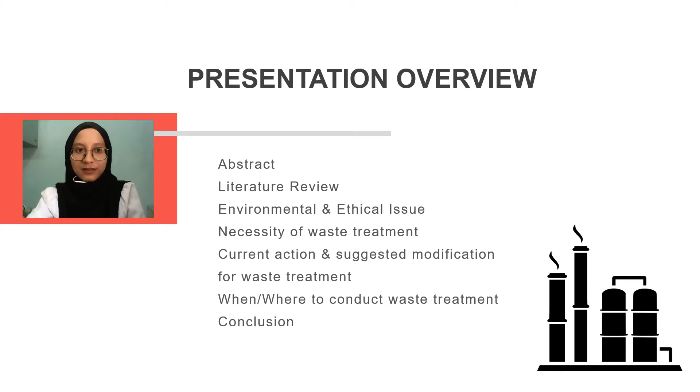My name is Kamarina. I will present the abstract of this study, which can be divided into 5 parts. The first part is the role of engineer, which is to ensure that the waste is disposed and treated in a correct manner according to the regulations specified by DOSH, NIOSH, and OSHA. The second part is the environmental and ethical issue. Some of the environmental issues identified are the loss of containment, atmospheric emission, and release of hazardous air pollutants. Some of the ethical issue identified is poor waste management practice.

The third part of this study is the necessity to treat and dispose waste correctly, due to the nature of waste itself, which can be hazardous, corrosive, and even flammable. The second reason is to comply with the standard regulations. The fourth part of the study is the current action taken to mitigate the issue, the problem arising from this current action, and the modification that can be made to improve the current action.

The current action to mitigate the environmental issue is flaring is chosen instead of venting, because flaring releases lesser greenhouse gases compared to venting. However, it cannot completely remove the greenhouse gases, which can eventually cause global warming. Due to that reason, it is advisable to install a flare gas recovery unit (FGRU) to reroute the flared gas for power generation.

Next, the current action that can be taken to mitigate the ethical issues is the surveillance of waste practice management. However, this will add additional cost. Due to that reason, we suggested to use an analyzer instead of manual sampling point.

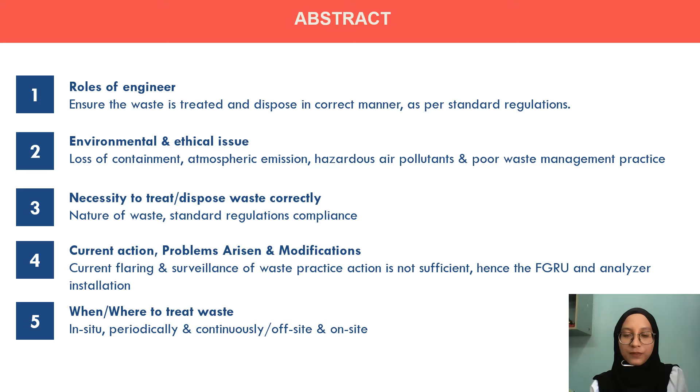My name is Oman Hakim and I will continue this presentation with literature review part. So for this part, I will explain more about the waste and also type of waste. Waste is any substance which is discarded after primary use or is worthless, defective and of no use. In biology, waste is any of the many unwanted substances or toxins that are expelled from living organisms, metabolic waste such as urea and sweat.

Waste can be categorized in many types such as municipal solid waste, biomedical waste, industrial waste, agricultural waste, and radioactive waste. Municipal solid waste is a solid waste that includes household garbage, rubbish, construction and demolition debris, and sanitation residue. Biomedical waste is a solid or liquid waste including containers, intermediate or end product generated during diagnosis, treatment, and research activities of medical science. Next, agricultural waste is a waste generated from farming activities, and this substance is mostly biodegradable.

Industrial waste is a liquid or solid waste that is generated by manufacturing and processing units of various industries like chemical, petroleum, coal, metal, gas, sanitary, and paper. And the last type of waste is radioactive waste. It's a result of many activities including nuclear medicine, nuclear research, nuclear power generation, rare earth mining, and nuclear weapon reprocessing.

As you can see in the slide, there is a waste contribution where you can see the majority of waste comes from industries, and only 8.33% comes from household and 5.78% from others. This means that much waste comes from industry, and that is why our topic is focusing more on industrial waste. Even statistics prove that 7.6 billion tons of industrial waste are produced annually.

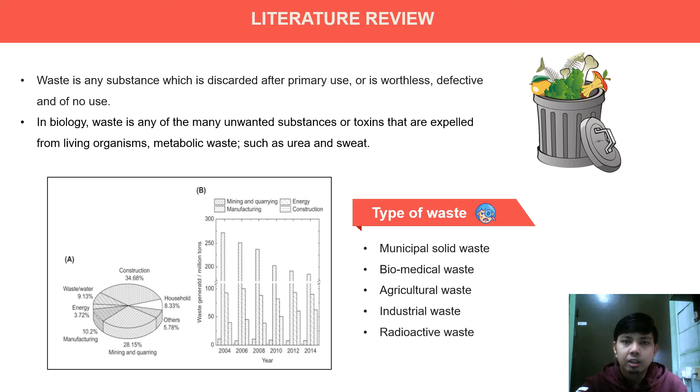So how, what, where, and when the issues can be solved will be discussed later by my friend after this. With that, I think that's all from me today, and I will pass the floor to Kamarina to discuss more about the issues related to this topic.

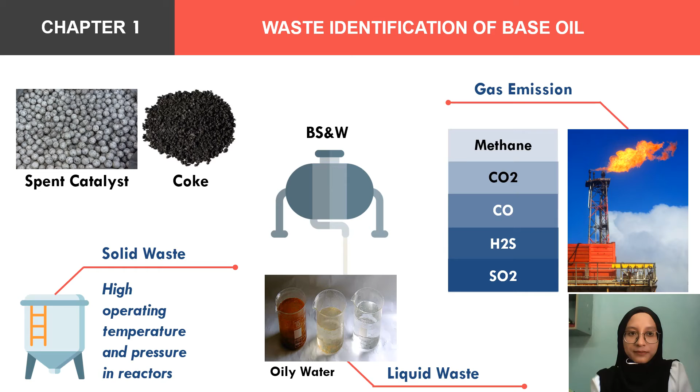The first issue is the loss of containment, which is due to the removal of coke, venting, and flaring. The second issue is atmospheric emission due to venting and flaring also, which release greenhouse gases which can cause global warming. The third issue is the release of hazardous air pollutant. In the hydrocarbons, usually there are volatile organic compounds such as benzene, xylene, and toluene.

The third part is the ethical issue. The first issue is the poor waste management system. As you can see from the slide, this is the picture of an improper design of waste storage near to a slope. It has the risk to contaminate the water bodies and also destroy the environmental preservation area. The second ethical issue is an infrequent sampling routine, which makes it difficult to backtrack the source of contamination.

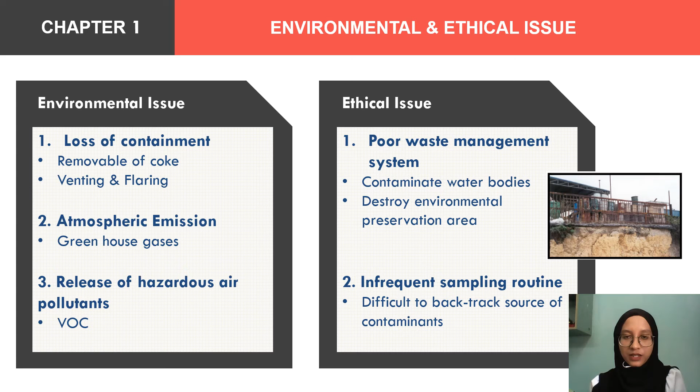My name is Siti Nur Syaza binti Abdul Rahman and I'll be presenting chapter 2, which is why is it essential to remove and curb waste during base oil processing. For my presentation, I will focus on the necessity to treat oil processing waste and the implication to society if poor waste management.

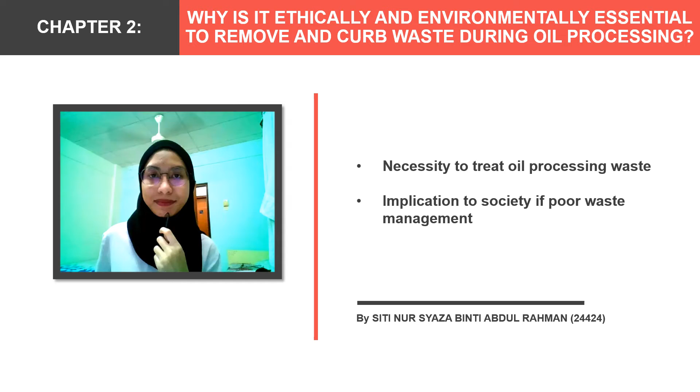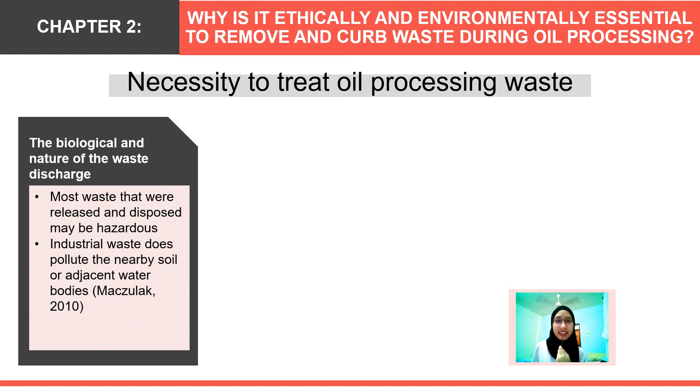In process plant, it is essential to treat oil processing waste. This is due to the biological nature of the waste discharge. Most waste that were released and disposed may be hazardous, and Maczulak 2010 stated that industrial waste does pollute the nearby soil or adjacent water bodies. Next is to comply with the standard regulations that were set by authorized bodies such as OSHA, DOSH, NIOSH.

Then, to make sure that the final product of process is on specification. This is to make sure that the product is on specification to cater the customer needs and the product should satisfy the economy of the process plant.

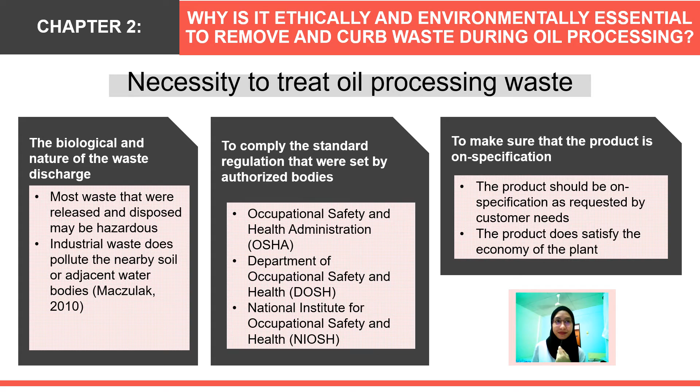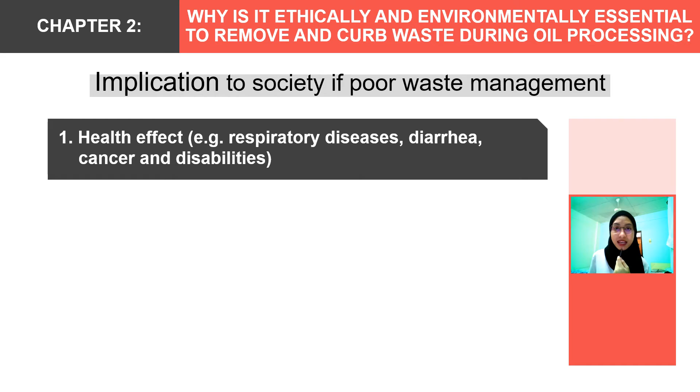Implications to society of poor waste management are health effects such as respiratory disease, diarrhea, cancer, and disabilities. It is also disturbing the life cycle of living organisms and basic human needs. According to Jones 2018, severe pollution, disease, and urban flooding which leads to greenhouse gases.

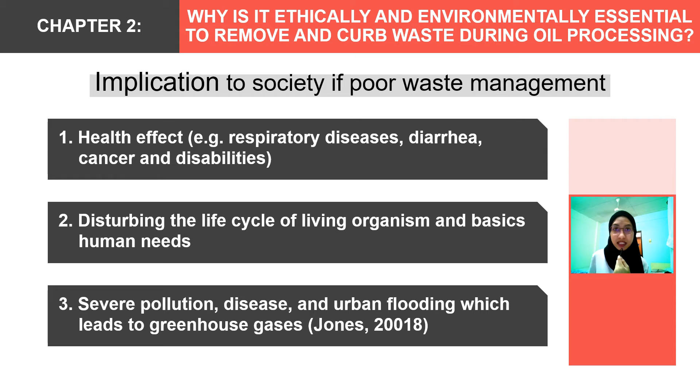Hi and good day. My name is Mohammed Danish, and I will be presenting about Chapter 3 on how can the current ethical and environmental issues related to waste treatment be improved. In this chapter, there will be three subtopics, which are the current action taken by the oil industry to mitigate the arising environmental and ethical issue, the problem that arises from the deployed current action, and lastly, the modification on the current action.

As mentioned by Kamarina in Chapter 1, the environmental issue is the venting of overpressure volatile organic compound, VOC, or hydrocarbon to the atmosphere, and loss of containment of hazardous gas to the environment. While the ethical issues are about mismanagement of waste material and lack of waste sampling. Current action taken to mitigate the venting and loss of containment of hazardous gas, such as VOC and hydrocarbon, is by directing the gas vented out from the system due to system overpressure.

The venting of these gases to the atmosphere poses high greenhouse gas effect as well as fire and explosion threat to the process plant. By flaring, the hydrocarbon will be incinerated forming carbon dioxide, thus reducing the risk of fire and explosion. However, an issue arises when this action is taken where flaring still emits greenhouse gas and is a form of resource wastage. Therefore, modification can be made by redirecting the vented gas to the flare gas recovery unit, being treated as fuel for the power generation system.

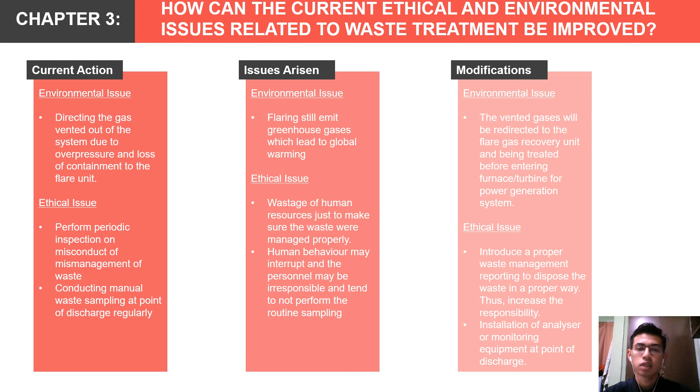Therefore, a modification that can be made to eliminate this ethical issue is installing an analyzer or waste monitoring equipment at the point of discharge. Installation of monitoring equipment will increase the reliability in monitoring the waste disposal at the point of discharge. That's all from me for chapter 3.

I'm Nur Hidayah binti Ahmad Yunus, and I will be explaining question 4 and 5, which are when and where to implement the actions. So first, we need to periodically evaluate all waste streams for continual improvement of management practices. We need to do it periodically because technology keeps advancing, legal requirements change over time, and the availability of external service providers also varies. And it needs to be done at all the waste streams.

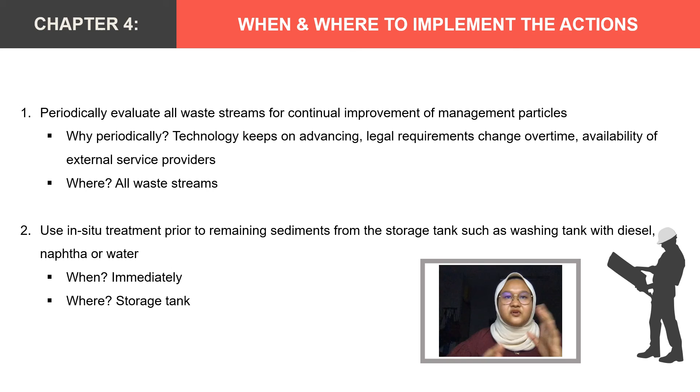Another thing is, for example, if we already changed our ways of treatment, if we do the evaluation, we can verify the volume and the characteristics of the waste. Is it keeping on increasing or keeping on decreasing? If it keeps on decreasing, then it's good.

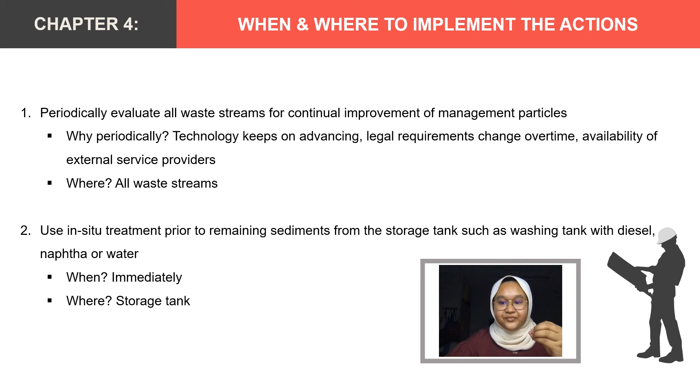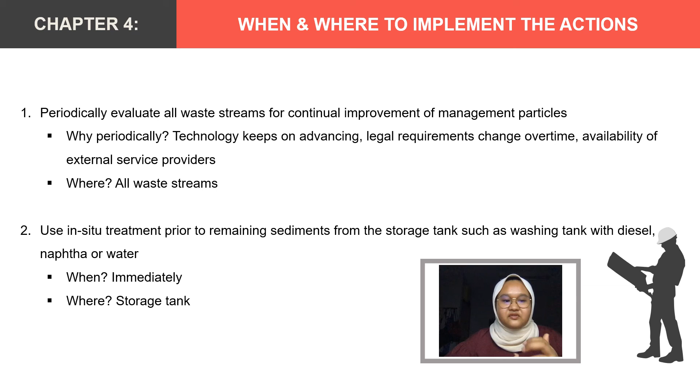Next, we'll be using in situ treatment prior to removing the remaining sediments from the storage tanks, such as washing the tank with diesel, naphtha, or water. The sediments from impurities in the stored material and corrosion materials that form in the steel will accumulate over time, and need to be removed periodically, typically when the tanks are out of service for inspection and maintenance. However, before we remove the waste, we need to wash it with diesel, naphtha, or water at the storage tank.

Next, audits need to be done on waste management facilities for both on-site and off-site facilities. What does on-site facilities mean? It's if the process plant has its own treatment system. In our case, we have our own water treatment system. And we use off-site treatment facilities for our spent catalyst, where we use a third party to dispose the spent catalyst. These audits need to be done regularly on-site and off-site to ensure verification of technical aspects of good practice, environmental aspects of the process, workers, and installation safety.

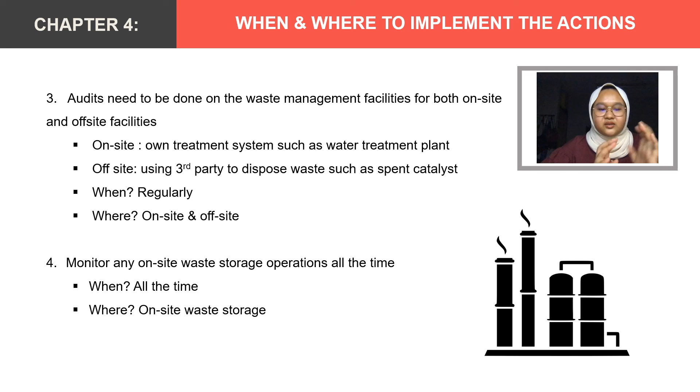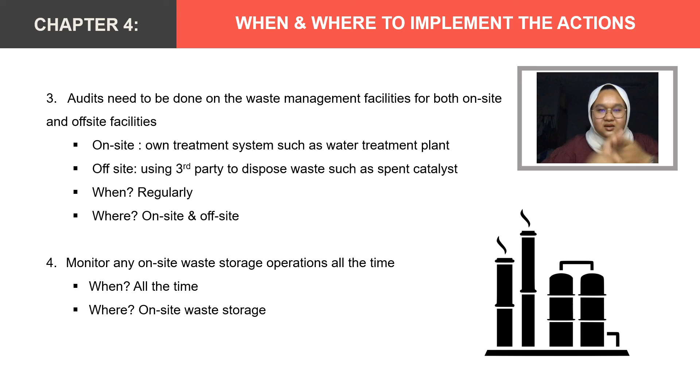And lastly, we need to monitor any on-site waste storage operations all the time. This is because we need to identify and prevent any potential contamination of soil and groundwater. For example, the containers that we use to store the waste should be compatible with the waste stored. It should not react with the storage, and it should not be pressurized.

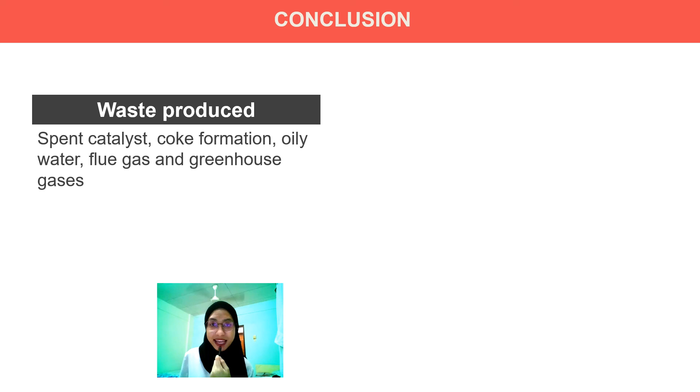To conclude this project, the project produced some waste, which were spent catalyst, coke formation, oily water, flue gas, and greenhouse gases. The environmental issues faced by the process plant were loss of containment, atmospheric emissions, and release of hazardous air pollutants. Hence, it is necessary to treat the waste as it is hazardous, corrosive, toxic, and flammable. Thus, actions to mitigate the waste were proposed.

One of the actions was flaring instead of venting practice and regular surveillance of the waste management system. Besides, rerouting flaring to a power generation plant could help sustain the environment and economy of the process plant.